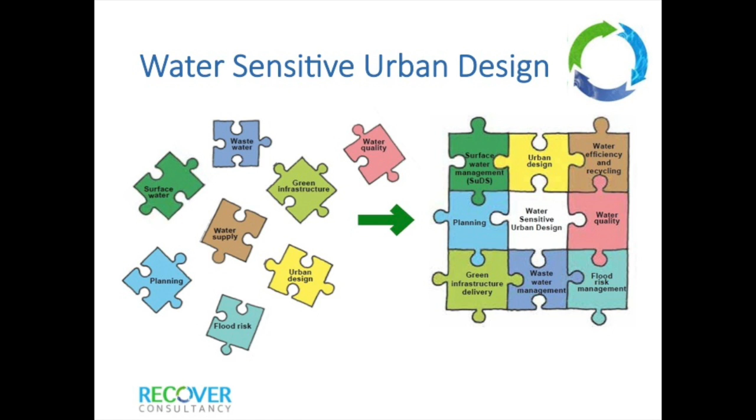What is water-sensitive urban design? It is the process of integrating water cycle management with the built environment through planning and urban design. Instead of designing the water infrastructure separately, it is included at an early stage of the design process. Water-sensitive urban design can bring about many benefits. With proper planning, it can mitigate flooding risks in the region, overcome water shortage in the community, reduce water costs for the users, promote growth, and make the environment more livable.

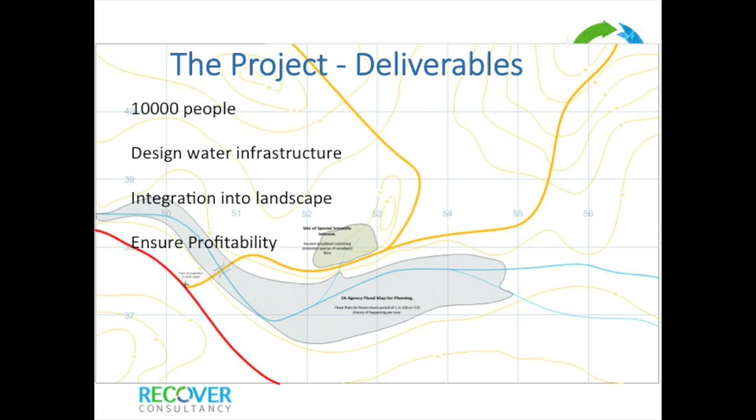Our aim is to design a water-sensitive urban development for 10,000 people in the southeast of England. We are to focus on the water infrastructure and integrate it into the landscape. Moreover, the profitability of the investment has to be ensured. Furthermore, the requirements of different stakeholders, such as the Environment Agency, local authorities, a local environmental interest group, and the Water and Sewerage Company have to be considered. These requirements set the main constraints for the development.

Our vision is to deliver a development that will be easily marketable in order to ensure a reasonable profit margin for our clients. We commit to develop a water system that minimises the impact on the existing water cycle, and finally, we want to create a community that people will enjoy living in.

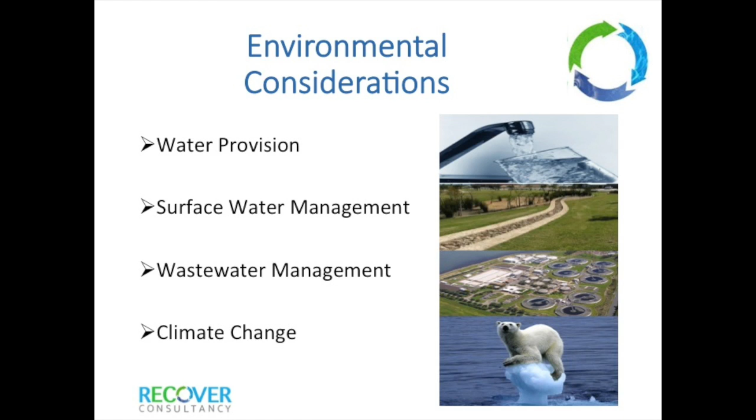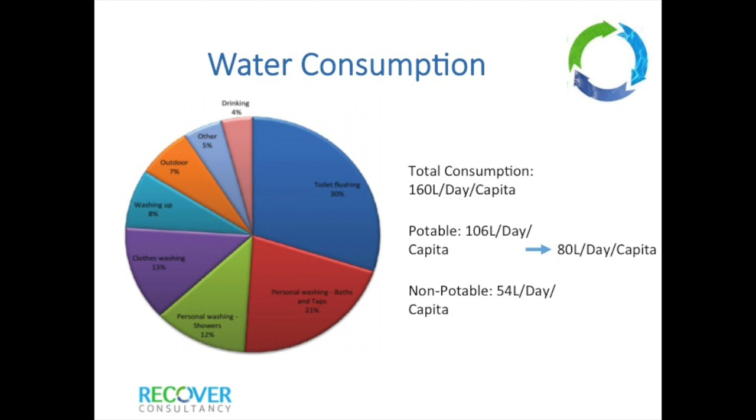In order to gain an initial understanding of the design requirements, we separated the analysis of environmental infrastructure into 3 different topics: water provision, surface water management, and wastewater management. We also consider the impact of climate change on the water cycle of the development. In the UK, the domestic water consumption is on average 160 litres per day per capita. This pie chart shows the distribution of how this water is used, of which 65% requires potable water and 35% can be non-potable. Our aim is to reduce the potable water consumption from 106 to 80 litres per day per capita using water-efficient appliances and recycling systems.

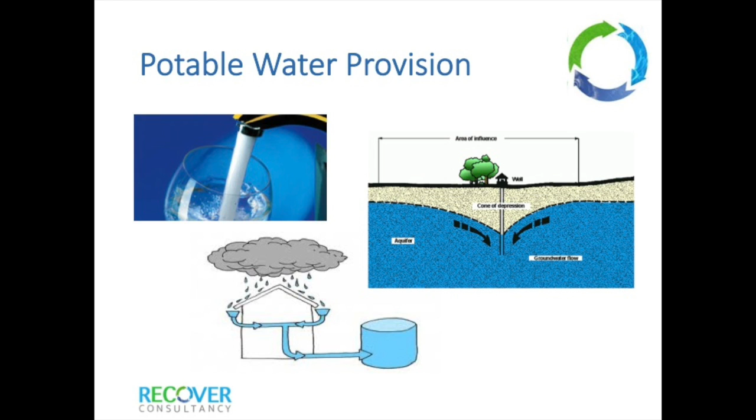Potable water is water that is safe enough for consumption. We aim to provide potable water from either groundwater extraction, from mains, or rainwater harvesting. After analysing all the options, we decided that groundwater is the most economical and environmentally friendly option. Our site is located above a confined aquifer, which is naturally recharged at the northwestern outcrop only. The aquifer will also need to be artificially recharged after groundwater is extracted to maintain equilibrium and reduce the impact on the water cycle. Artificial recharge will be achieved through injection wells.

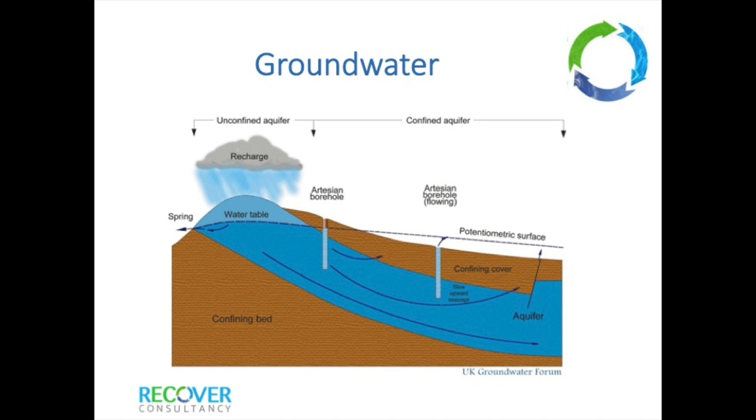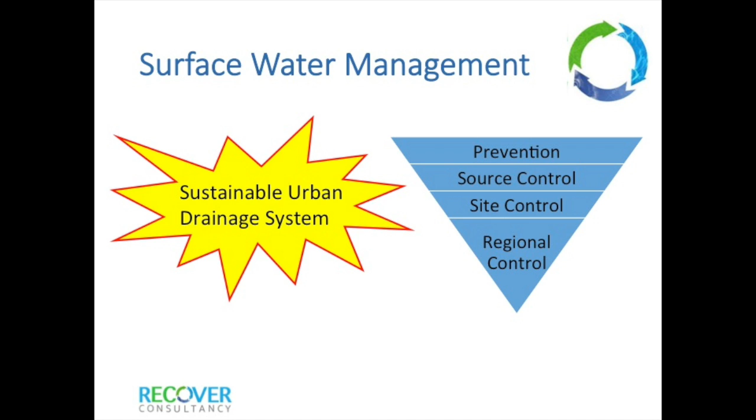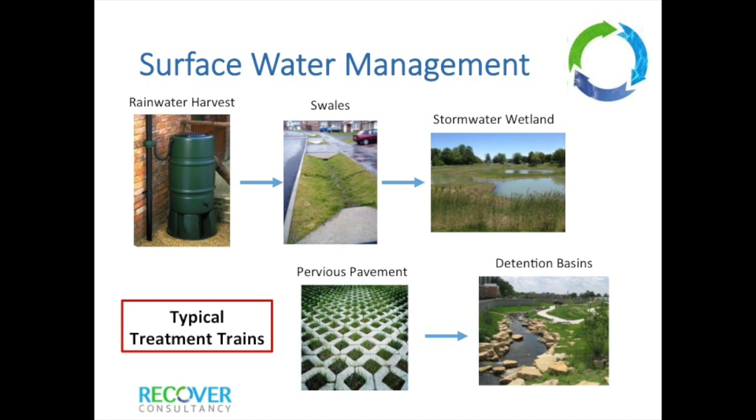Sustainable urban drainage systems help control and manage the surface water runoff. They can reduce runoff volumes or attenuate peak flows in order to reduce the risk of pluvial flooding. The most preferable option is to prevent the rainfall from going into the drainage system rather than controlling the runoff later on. SuDS are usually combined in treatment trains, for example, harvesting rainwater from the roofs into storage tanks, then draining it in vegetated trenches instead of stormwater sewers, and finally leading it into a wetland or pond. Alternatively, pervious pavements can collect rainwater and lead it to detention basins in case of heavy rainfalls.

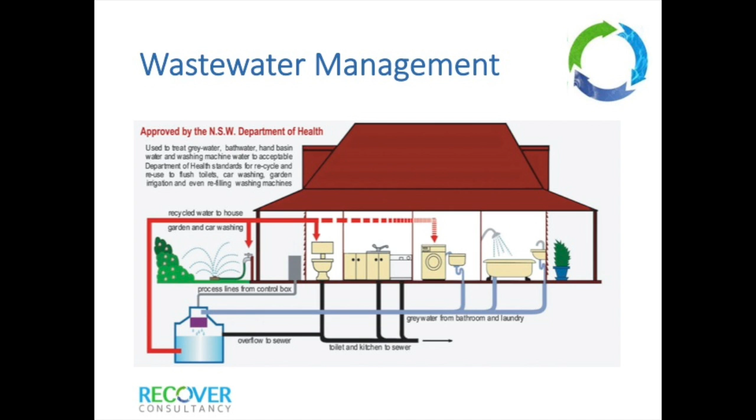Generally, domestic wastewater can be divided into 2 categories: grey water from bath, laundry services, etc., and black water from toilet flushing and kitchen sinks. Recycling of grey water is preferable, as black water requires more extensive treatment. A decentralized grey water treatment system will reduce water consumption dramatically. 3 options have been considered for the treatment of black water. The first option is to direct wastewater to the existing sewer trunk. The second option is to construct an on-site small-scale wastewater treatment plant, and the third is to build 1 or several constructed wetlands.

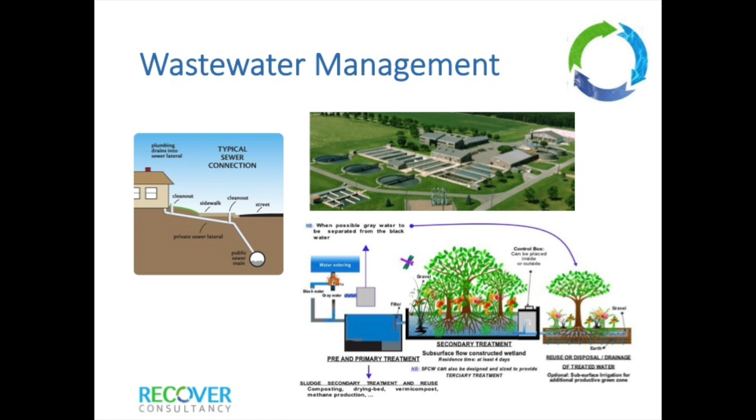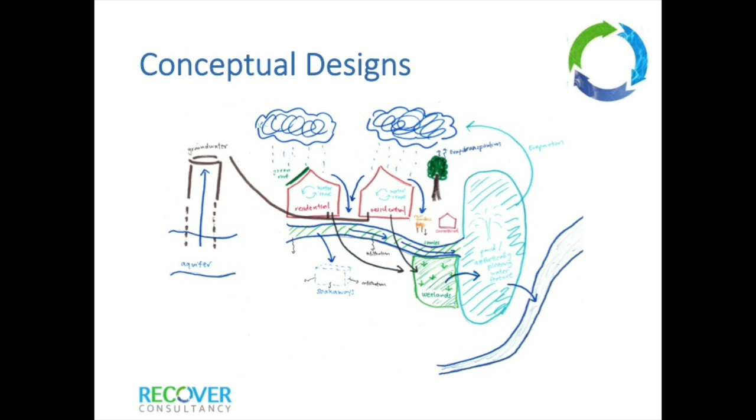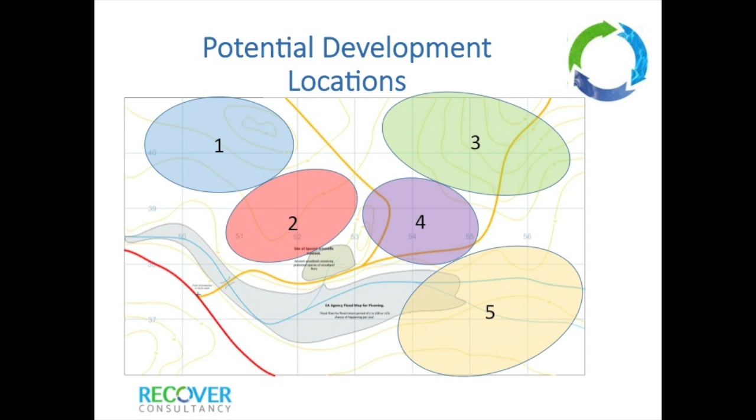This design shows how we imagine the development by integrating different water management strategies. We will use this design as a guideline to evolve our ideas and aim to minimize the impact of the development on the local water cycle. However, this design is highly dependent on the location choice. We have provided the client with 5 potential areas for development and are currently analyzing each one by considering the topography, distance to existing water infrastructure, and the local environment. At the moment, we consider sites 1 and 2 as the best locations for further development.

It is key that we decide who we envision living in our development. This will affect the direction we take in terms of housing sizes, floor plans, housing prices, amenities, and marketing plans. Our targeted customers shall focus on young families, retirees, as well as people seeking green and non-urban style lives. We plan to design housing that blends in well with the natural landscape and provides sustainable and contemporary living conditions to our customers. This will be achieved via using timber frame structures, stones, and glass as our main construction materials. Interchangeable floor plans will also provide a flexible solution to variable demand.

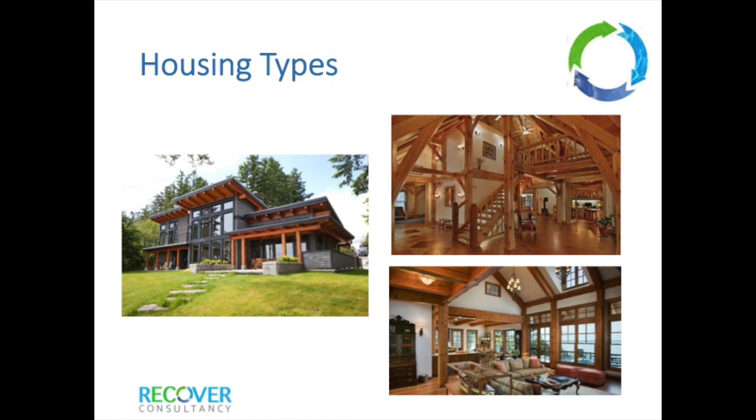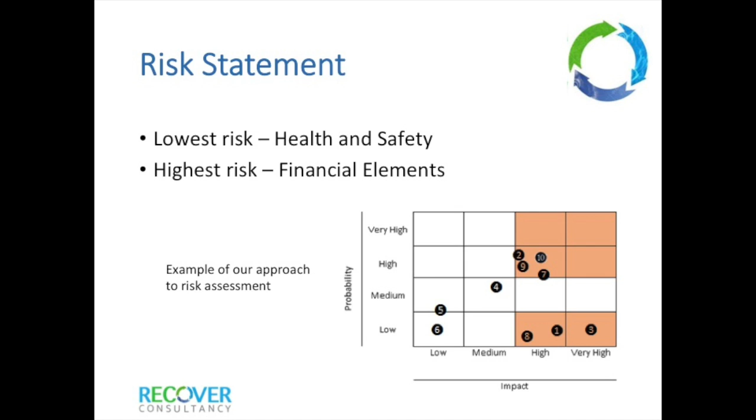The overall risk of the development may be considered as medium to high. The organization's lowest risk appetite relates to health and safety issues as well as to environmental and conservation concerns. More risk, however, is taken towards the financial elements of the development. This is due to the innovative character of the design. Health and safety is a paramount and integral aspect of our development. We aim to have 0 fatalities throughout the construction process and reduce the risk of fatalities and injuries throughout the design life. Incorporating these risks at a very early stage in designing can save both time and money in the future.

The initial meetings with our clients have shown that we are working in the right direction. The next stage of the design process will involve developing iterative multi-criteria assessments to further narrow down the options in order to produce the optimal solution of our project.